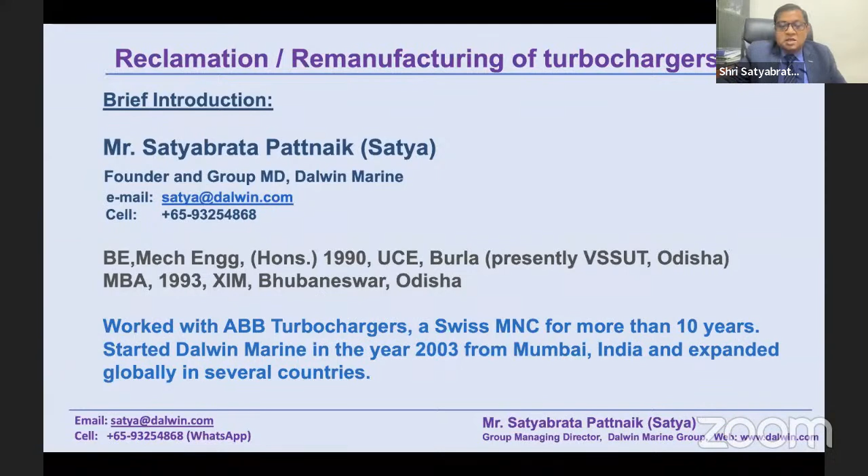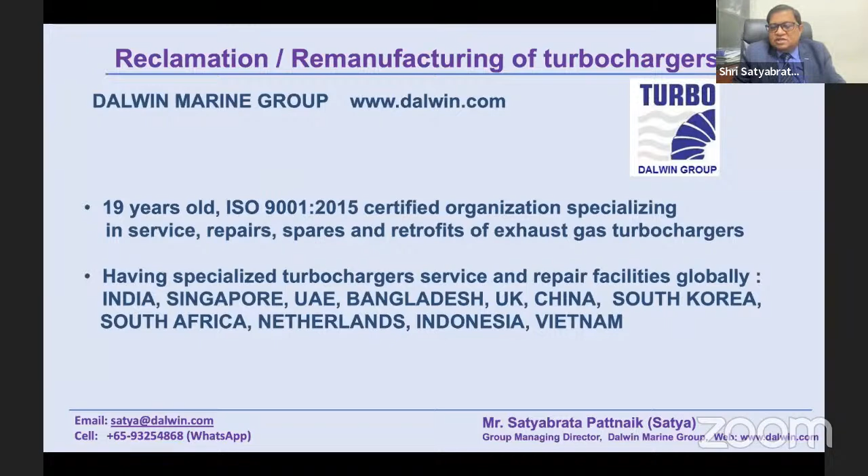Okay, so as Dalwin Marine, as a group, we are 19 years old, an ISO 9001 company, and we are dealing in service, repairs, spares, and retrofits of exhaust gas turbochargers. And we have our own setup and service facilities globally in several countries like India, Singapore, UAE, Bangladesh, UK, China, South Korea, South Africa, Netherlands, Indonesia, and Vietnam.

And we are associated with major turbocharger manufacturers, Mitsubishi Japan, KBB Germany, and jobs that we carry out are service overhauls, specialized repairs, retrofits, refurbishment of the components, and supply of spares related to the turbochargers. Okay. And now let's move on to the next slide.

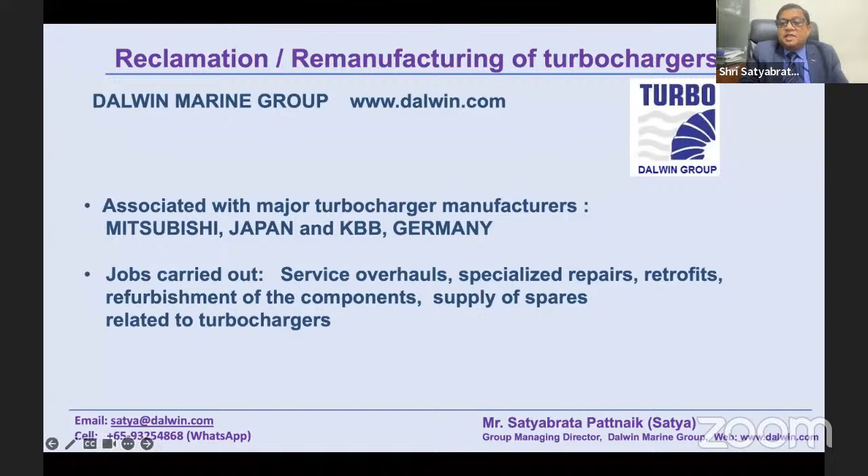Okay. So what is a turbocharger basically? A turbocharger is a centrifugal compressor driven by an exhaust gas turbine wheel. Okay, before I go into detail, I must tell you this. I have been seeing this seminar. We have got a lot of technical inputs, a lot of theoretical inputs. So my presentation is more on the practical side, because that's where the implication of the remanufacturing of this thing will be used and how we can develop this turbocharger as a product.

So a turbocharger is used to increase the boost pressure of an engine. So when you use a turbocharger, the boost pressure of an engine increases. This leads to better fuel economy, lower temperatures, better life of the components. And how it works: exhaust gas from the engine is passed through a nozzle ring, which converts the thermal energy of the exhaust gas to kinetic energy. This kinetic energy is used to rotate the turbine shaft. The compressor wheel, which is connected at the other end of the turbine shaft, sucks in fresh air, compresses it and leads it to the engine.

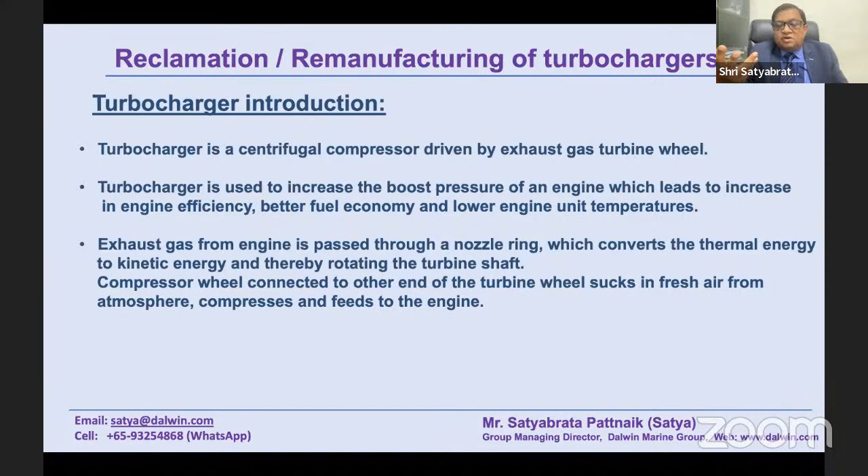Now this process is very interesting because this turbocharger doesn't use any external energy. It uses the exhaust gas, which would have otherwise been wasted to the atmosphere. And we are increasing the efficiency and power, what I can say, the fuel economy of the engine. So this is how it works.

The exhaust gas enters here and converts into kinetic energy, rotates this turbine shaft here. You can see the turbine wheel here, it rotates and it goes out. At the same time, because it is rotating, this here, called the compressor side, is also rotating because both are on the same rotor. So this sucks in fresh air, compresses the air and gives it to the engine. Okay, this is very interesting technology where, as I told you, we are not using any other external resources to run this equipment. It is using the heat energy of the engine, which otherwise would have been wasted.

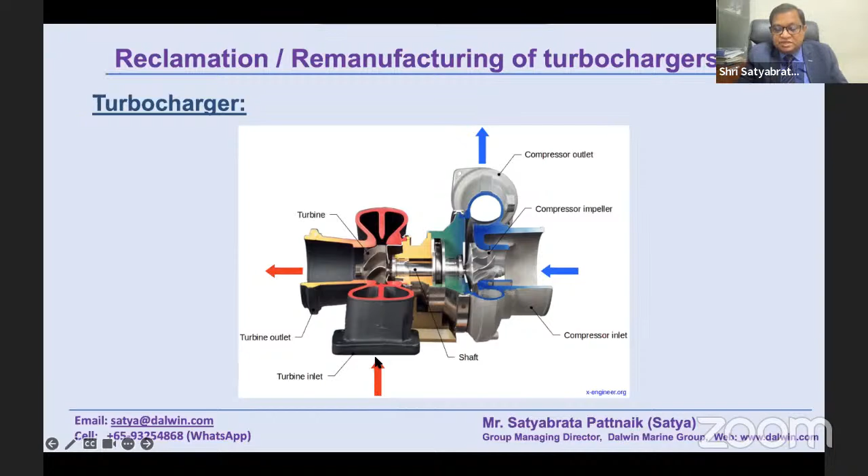So normally when you use a turbocharger, we get a lot of advantages. Cleaner exhaust, that means we are giving less NOx and SOx gases to the atmosphere, which is the talk of the day today worldwide. And also fuel economy, you get better power, and also energy recovery. What I told you would have been wasted, we are now recovering.

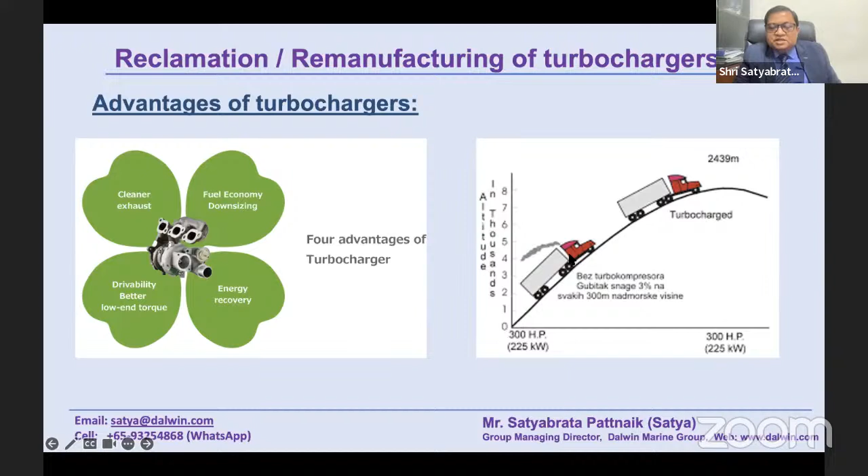And using a turbocharger, you can see, this is a clear example. Now this truck is trying to go up without a turbocharger. Now this is going up smoothly with a turbocharged engine. So this is the difference we can see physically. And we can see a lot of smoke coming out, and here there is no smoke.

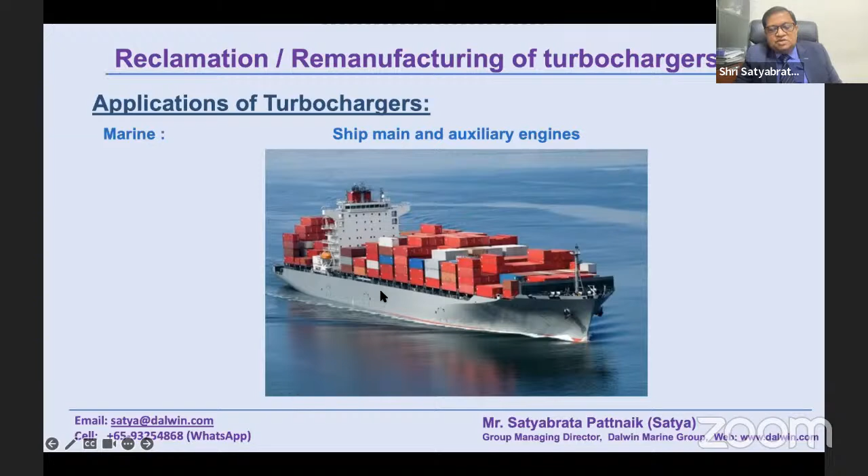So where are turbochargers used normally? Turbochargers are used in many applications. One of the major applications is marine. In a ship, there are two types of engines, the ship main engine and auxiliary engines. The main engine is used to propel the ship forward, and the auxiliary engines are for the power required inside the ship. For example, the internal air conditioning, the operation of the equipment, or the cranes and all that. In both the engines, turbochargers are mounted. So this is one of the major applications.

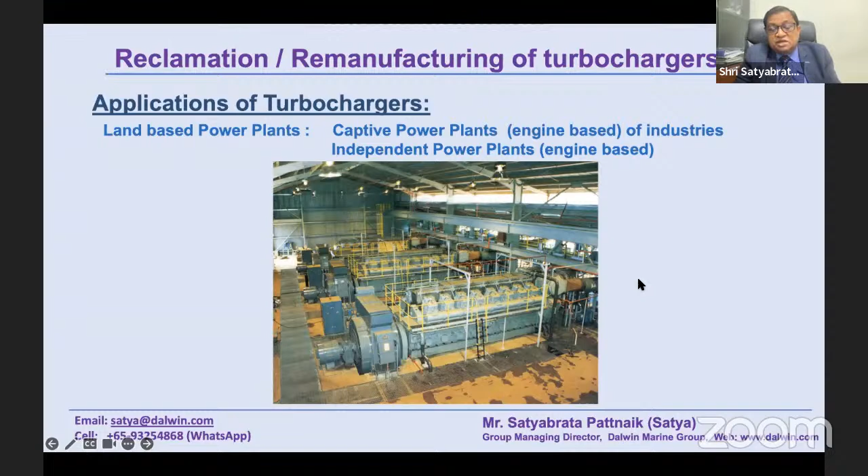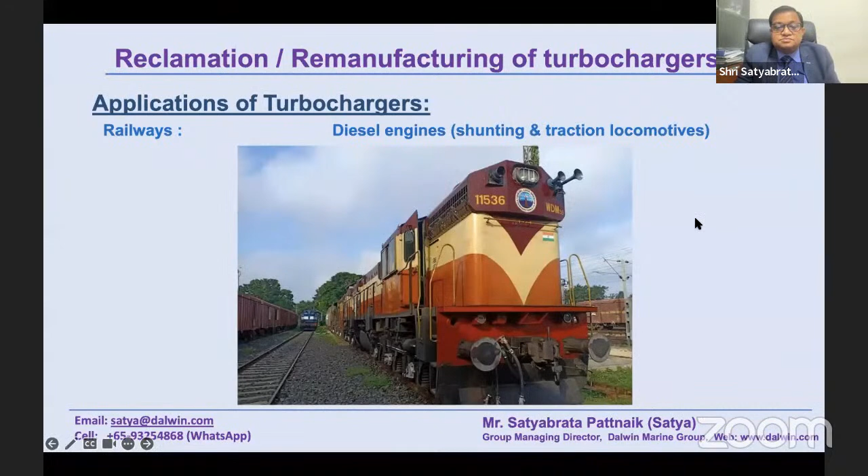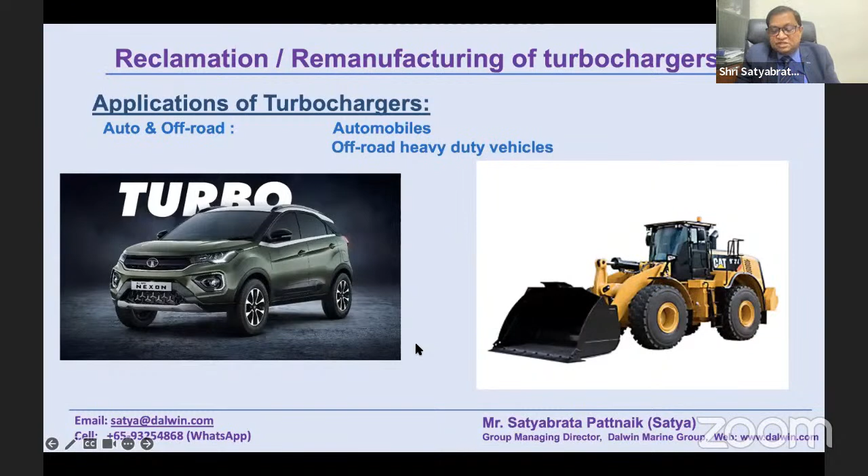In railways also, the turbocharger is used in the diesel engines. So these kind of engines which are mainly for traction or shunting, we also use turbochargers. And nowadays, in fact, all the automobiles are having turbocharged engines. So it has gone to that scale now. Off-road, like all heavy equipment, as well as the automobile industries, everybody is having turbocharged engines now. So these are the practical applications of the turbochargers.

Now, this is the main aspect which I was about to tell you all: how we do the maintenance and service of the turbochargers. So turbocharger service comes in routine service. When I say routine service, that means at certain hours of operation, for example, 8,000 hours of operation or 15,000 hours of operation, or as specified by the manufacturers, the service has to be done. So this is called routine service.

Breakdown service: if there is any emergency breakdown, then we have to do breakdown service. But in case of breakdown service, the situation becomes very costly for the customer. Sometimes the ship is mid-sea or somewhere very difficult to reach. So they spend thousands and thousands of dollars only to send one technician to the vessel. So sometimes this becomes a real nightmare situation. And routine services, normally preventive maintenance, we should do in time to avoid this kind of situation.

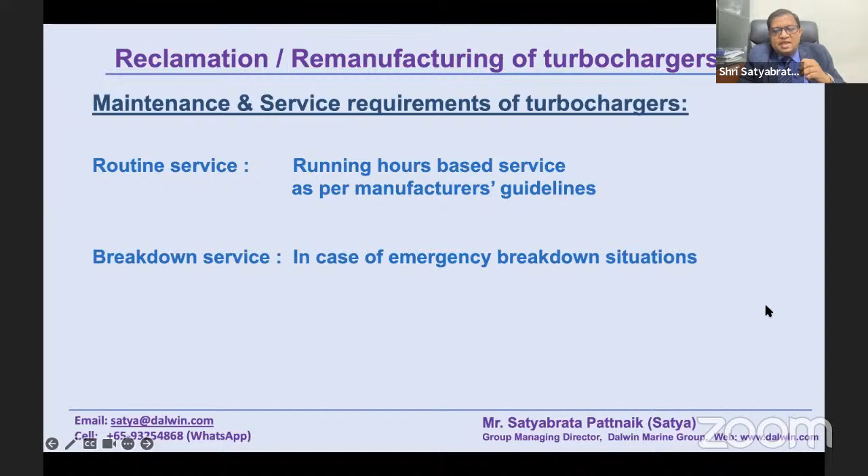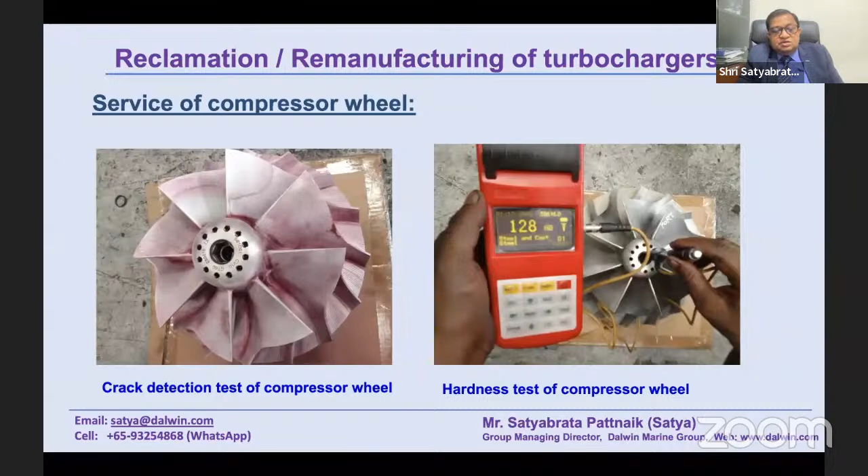And sometimes these edges of the compressor wheels are worn out. You can see these edges. Now, all the manufacturers of these turbochargers recommend to replace it. This is where an opportunity of repair, reconditioning, or remanufacturing is there. This can be a good cost-saving benefit for the customer also. Not only that, suppose there is one problem here and we are not able to get a compressor wheel in time, then the repair doesn't happen in time. The vessel is unnecessarily held up. So this is also one area which needs to be seen.

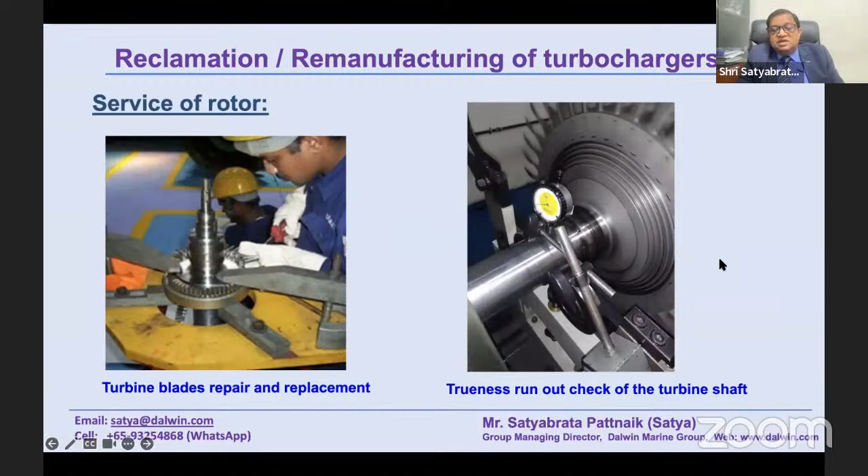Okay, then the rotor. For the turbine rotors, sometimes the turbine blades are damaged, and we do repairs of the turbine blades. And we do the run-out check of the turbine shaft. If there is any bend, then we'll try to repair it. Otherwise, if there is too much bend, we have to reject it. This is also another scope of opportunity: if there is any unusual bend on the shaft, how we can straighten it without sacrificing the internal metallurgical properties. So this is one of the areas where we can also start working and give beneficial things to the customers.

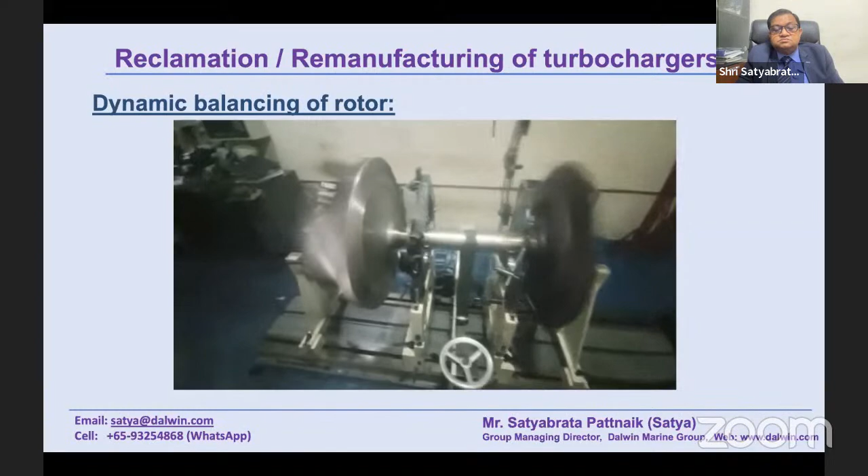Now, this is very important in all our workshops worldwide. We have got a Schenck Germany balancing machine where we do the dynamic balancing. So I will show you a small video. As you can see, this is the computer screen showing how much unbalance is there and at what degree. So accordingly, our operator who is doing the balancing will correct it and try to bring these red dots towards the center.

Because turbochargers are very highly sensitive equipment, running at a very, very high RPM. And here you can see we are going into milligrams. These are all grams, 2.54 grams, 1.66 grams. So even such a big rotor has to be corrected by such a minute weight, so that in operation there is no problem, there is no vibration, and the equipment can run perfectly well. All our workshops have this kind of balancing machine made by Schenck, Germany.

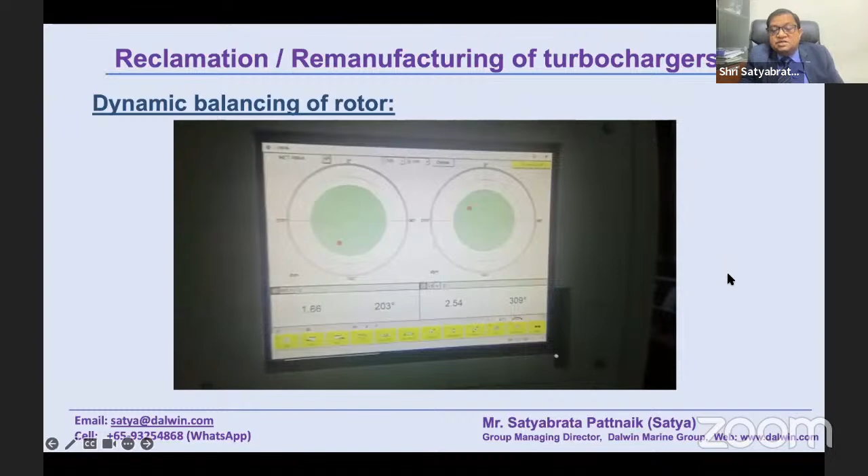Okay, this is that balancing machine. You can see the pedestal, and this is the control panel where it is all controlled, and it gives the degree where the correction is to be done, and based on that the operators will do the corrections. These are kept in specialized air-conditioned rooms so that the equipment is properly maintained.

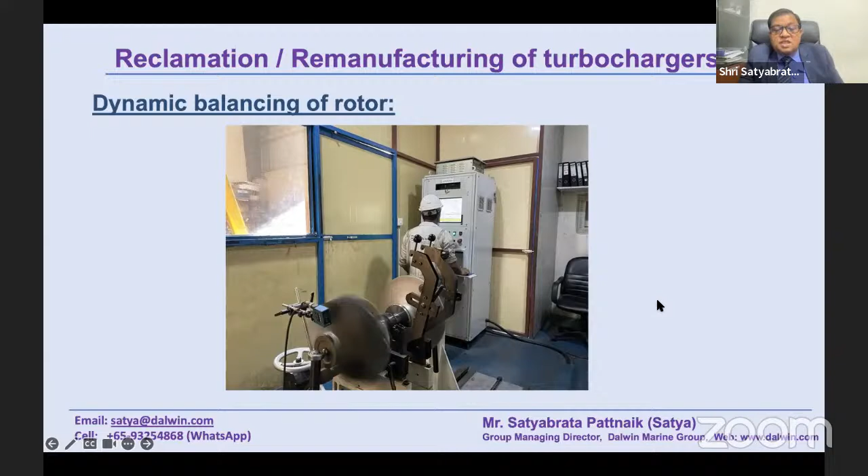Now, coming to the real topic where we are now heading to is how we can use our available resources to really bring in technologies to India to develop and really save the cost, and also be beneficial for both customers and for us and everybody.

For example, in the turbine rotors, you can see turbine rotors. In each turbine rotor, this kind of erosion happens regularly. We have seen it regularly in almost all the rotors. This is the bearing journal area where there are several pitting marks. These are the piston ring area. They call it piston ring area, which is completely eroded.

Now, if we use it in this condition, what happens? There is a lot of lube oil which comes out of the turbine shaft this side. That means there is a lot of lube oil leaking from the turbocharger. Now imagine the turbocharger running and the exhaust gas temperature at 450 degrees centigrade. Okay. Now if this kind of lube oil leakage happens, it may lead to fire and accidents. So this is a very dangerous situation. We cannot allow the turbocharger to run in this kind of condition.

And here, because of pitting marks, this is a bearing journal area. So there is a bush bearing on which the shaft is rotating. Because of the pitting marks, there may be a lot of erosion on the bearings, and again the shaft will wobble and there may be accidents. So these are the areas of scope of repairs. Normally we do some kind of repair like laser cladding on this kind of area. Quite expensive now. So this kind of technology we have to develop.

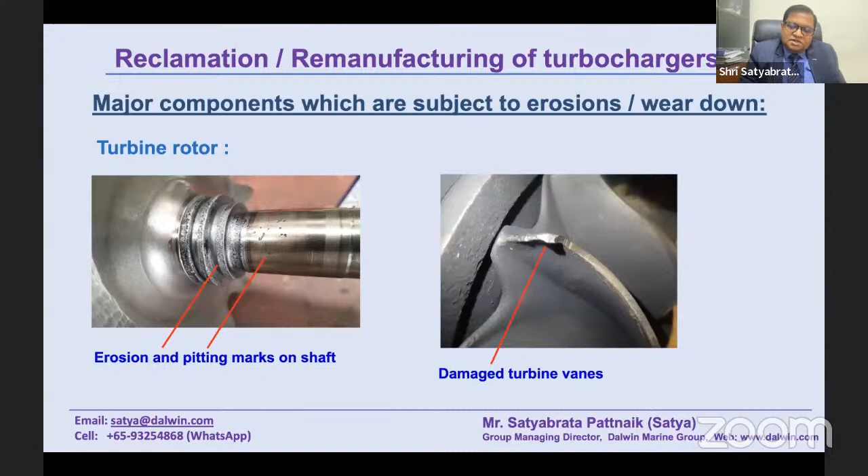Okay. Now gas casing, this is another area which we are regularly facing. When the hot gas from the engine enters the turbocharger, the gas casings are used to channelize these hot gases to the turbocharger. So they are subject to very high temperature, thermal stress, corrosion, all kinds of stress. So over a period of time, they develop cracks. You can see the cracks here also. It has gone through from here to here. Here also it has gone through from here to here.

So in these cases, what happens? Here also you can see the crack, up to here. So sometimes what we do, we drill a hole here, for example, and arrest the crack from going further. But whether this kind of crack can be repaired by welding needs to be seen, because we tried many times in fact, and it is not working. They're all GGG40 materials. Maybe if we improve some materials or change the metallurgy, probably we can do some kind of repairs. This can also lead to faster turnaround of the repair cycles and huge cost savings for the customers.

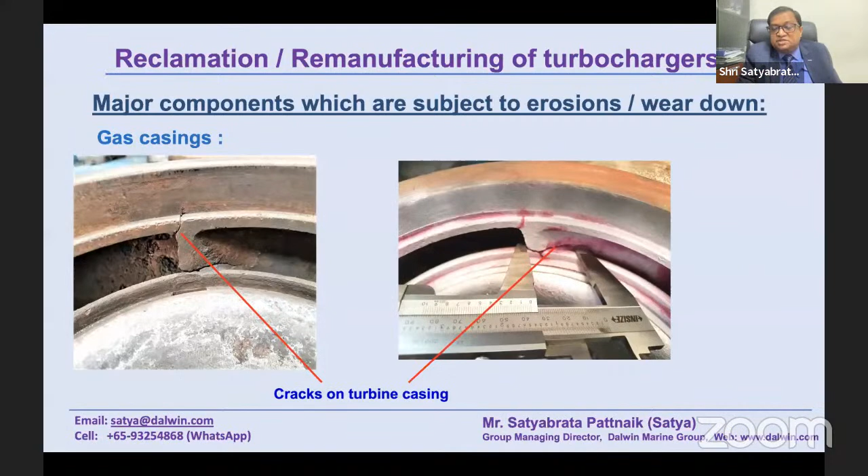There is another area where we can do a lot of work also. You can see nozzle rings. They are subject directly to the exhaust gas. The deformation has happened on the vanes. Here also you can see the nozzle rings are all damaged. So in this situation, normally we are replacing the nozzle ring. We are not doing any repairs, we just replace. Get a new nozzle ring, change it. So if these nozzle ring vanes can be repaired, probably customers can accept this as a reconditioned nozzle ring with maybe less warranty, but they can have cost savings and also easy availability, as I told you earlier.

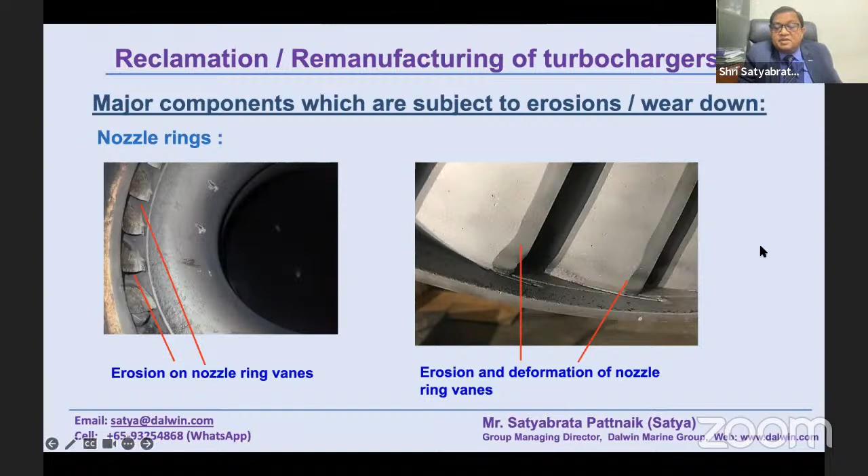As I told you, these are also the compressor wheels. You can see two practical cases from two vessels. These are all eroded here. When this kind of surface erosion at the vanes happens, the efficiency of the turbocharger decreases. That means when we are operating at say 67% or maybe 70% efficiency, it goes down, because there's a lot of leakage of air in this portion. So this has to be built up.

Normally, we are replacing it, because there is no option at the moment, no established repair procedures for this. Some workshops are trying MIG welding, some are trying some kind of bridging, but we have not seen any success on a large scale. So probably all the manufacturers or the good reputed workshops will just renew it. And these are really very expensive items, these compressor wheels.

And again, delivery times are very, very high. Normally, in case of KBB Germany, for example, 4 weeks or maybe 6 weeks. So a vessel will not be waiting for that. So normally the vessel goes out with this kind of damaged compressor wheel, sacrificing the performance of the engine.

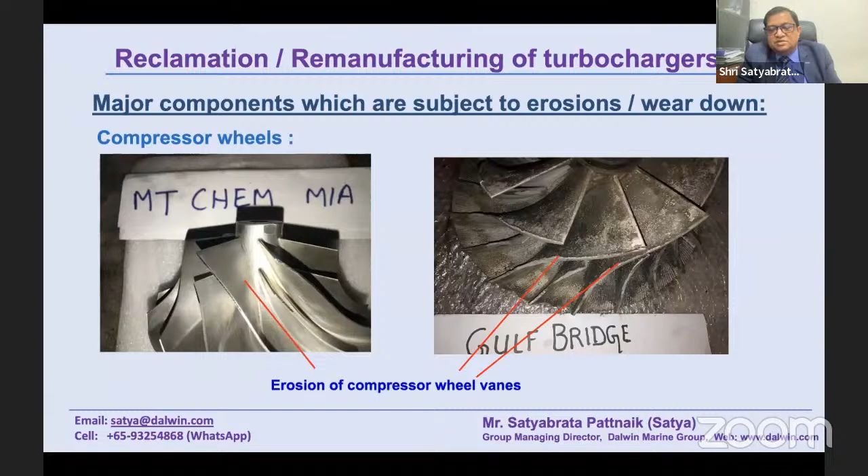So what is the present situation? As you can see, mostly we renew the parts which are eroded or damaged, or we do some kind of stopgap repairs to temporarily run the turbochargers till the spares are available. Okay, so this is what is happening now.

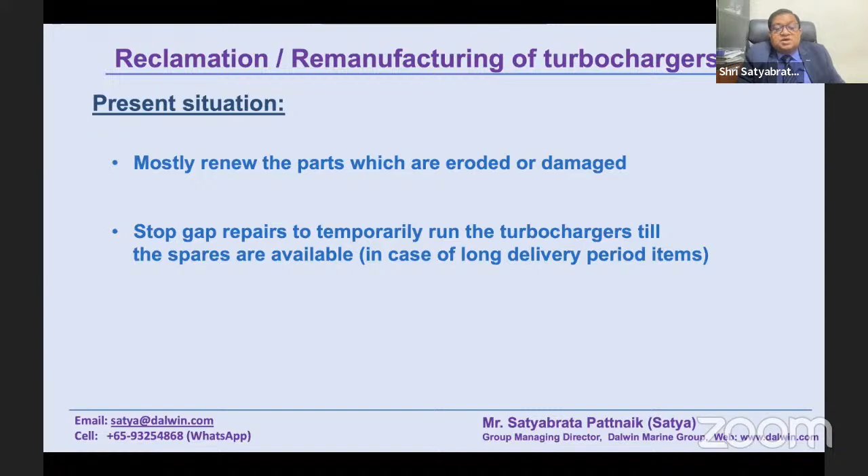But because of this, we have a lot of opportunities, what we can do. Opportunities to develop, you see. We develop special repair and refurbishing technologies to reuse the old spares, extending their lifetime. This is a big opportunity. This is a win-win situation for our own country, our own technology, our own people, and for the customers also.

Then study and develop new material and metallurgical compositions for the components to have better resistance to erosion due to hot gas. This is one area which really needs research and can be done, and this can benefit the industry in practical life. This is also one area which, if possible, we can try to research and do.

Install an inbuilt monitoring process to provide indication of the health of components, to take preventive actions in correct time, avoiding costly breakdowns. This is a nightmare for all ship owners, I tell you. Suddenly the ship is in the middle of the sea, there is a breakdown, and they spend millions and millions of dollars only to get it repaired. Sometimes the cost of the spare part may be some $2,000, but they may be spending $30,000, $40,000 only to bring that to the vessel. So this is a good opportunity.

If something can be worked out, some kind of a monitoring system can come out from the materials on a metallurgical perspective. Now we have got indications like temperatures, air pressures, or maybe engine load parameters, which give some indication that some malfunction is happening. But directly from the metal or from the body of the component, if something comes out, that can be much better. This is an area which can be developed.

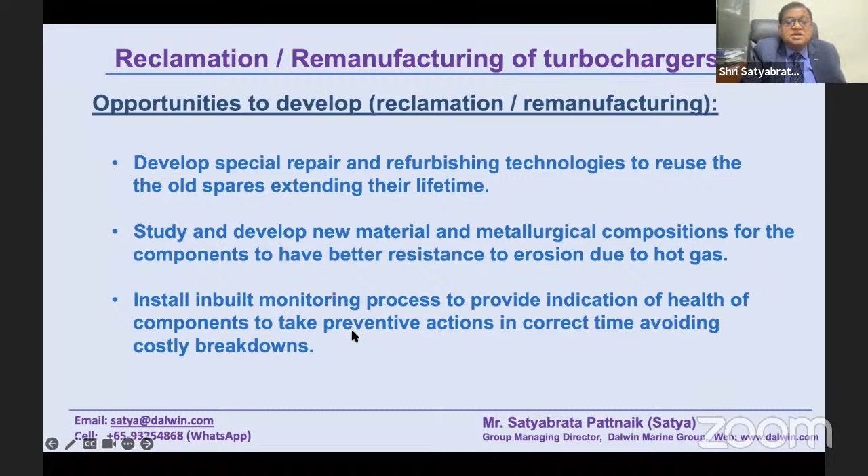So what are the benefits of using this kind of reclamation or remanufacturing? We can provide technologies which can reduce costs for the end users, leading to huge cost saving. This I have been telling from the beginning, because everybody is now looking at saving costs in operation, whether it's a ship operator or the power plant operator. So this is the first and most important.

And second important, availability of components to complete the repairs. This is a practical problem which we are facing because some parts are not available. Even this morning, a customer vessel is down. Some component is damaged. I just checked, the delivery period is 4 weeks. So they are saying, what to do, sir, kindly help us. So we're trying to bring that component to our workshop to see how we can do a stopgap repair. So this is really one major area which will help the customers.

Then, more options will now be available to customers, whether they will use new or remanufactured parts. When I say remanufactured parts, that means customers will also be given a warranty. May not be like a new one, but okay. At least they know that it is a reman part and they can use it for a certain time till they have new parts or something like that.

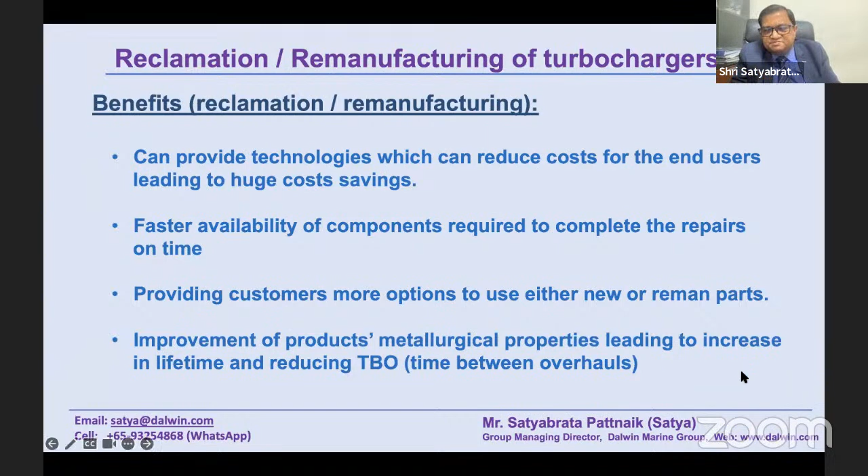Then what strategies we should do, really, from my perspective, having worked in this industry for so long, almost 30 years now.

Technological cooperation between the actual working industry like us and research organizations and institutes is important to foster development and testing of outcomes in real working conditions. I had been to NIAMT Ranchi recently, and as Professor Chattopadhyay mentioned, we are about to sign an MOU with NIAMT to work more on this, to have more practical solutions. We need to develop some special technologies in a more effective commercial way.

Laser cladding is now very expensive. HVOF metal spraying is available too, but we could have similar technologies at a commercial level that are cheaper or more cost effective. This can include laser cladding, HVOF metal spraying, aluminum alloy specialized welding for compressor wheels, and development of improved alloys for component manufacturing. These are some areas we can work on as strategies, working together with academic or research institutes using our practical experience and knowledge.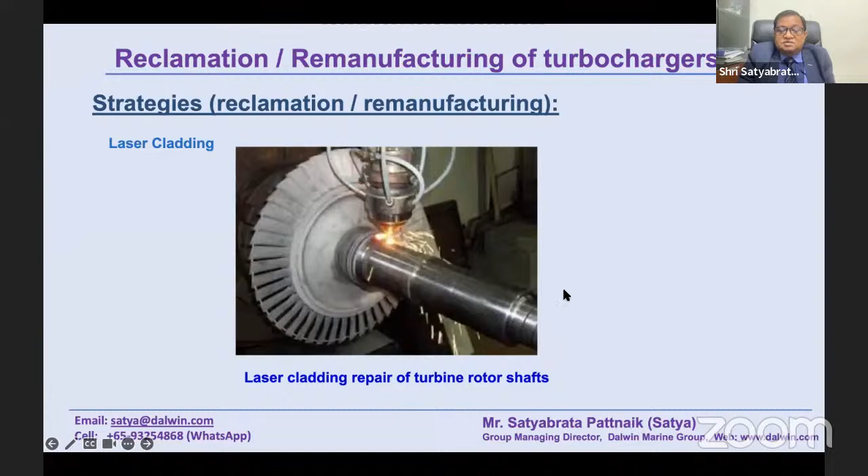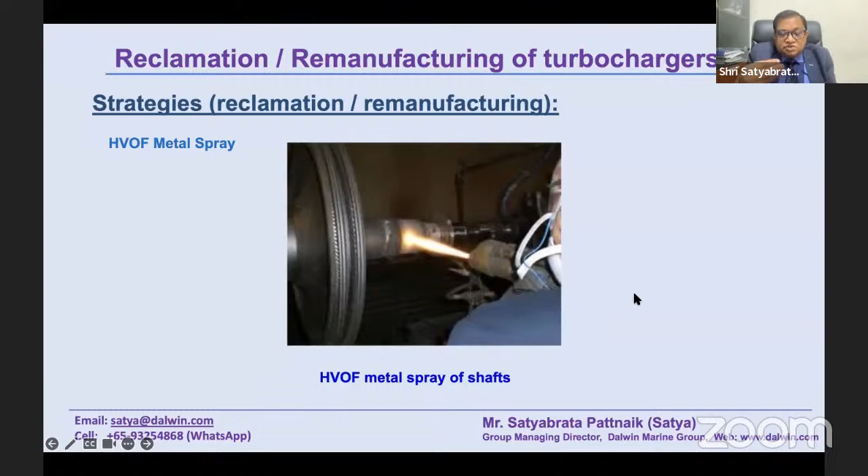This is HVOF metal spray, high velocity oxygen fuel spray. We are also doing this HVOF spray in one of the workshops in UAE, Dubai. This is being used nowadays, but only in cases of bearing journal areas where fusion is involved. In a normal cold repair process, this is not recommended. But anyway, what I want to say is that some work is going on, even though costs are very high.